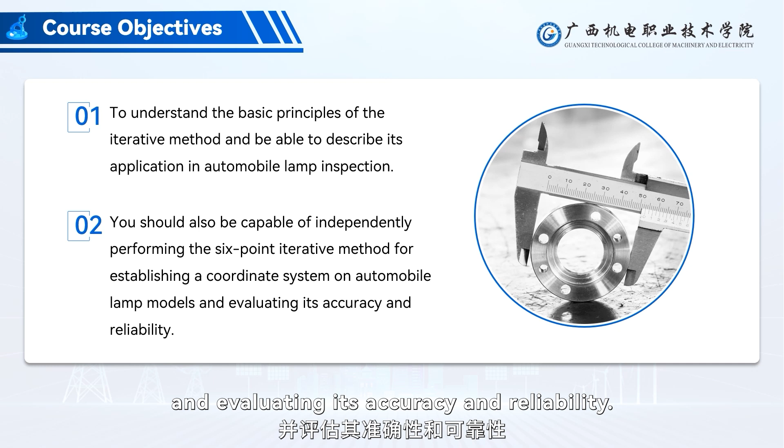Next, we will cover the following topics. By the end of this lesson, we hope you will understand the basic principles of the iterative method and be able to describe its application in automobile lamp inspection. You should also be capable of independently performing the 6-point iterative method for establishing a coordinate system on automobile lamp models and evaluating its accuracy and reliability.

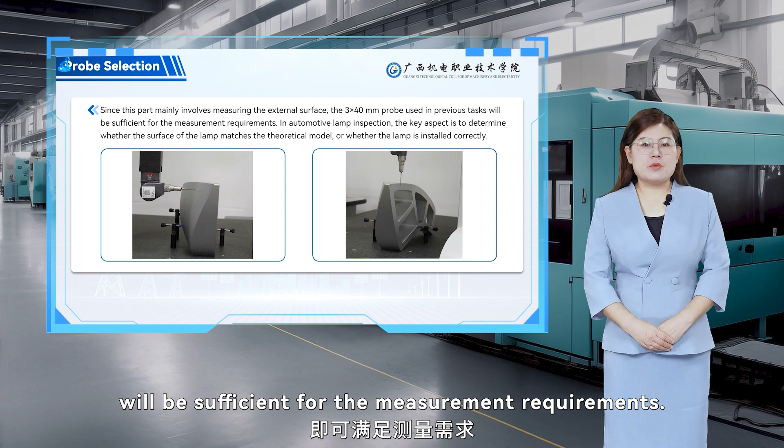First, let's talk about the selection of probes. Since this part mainly involves measuring the external surface, the 3 by 40 mm probe used in previous tasks will be sufficient for the measurement requirements.

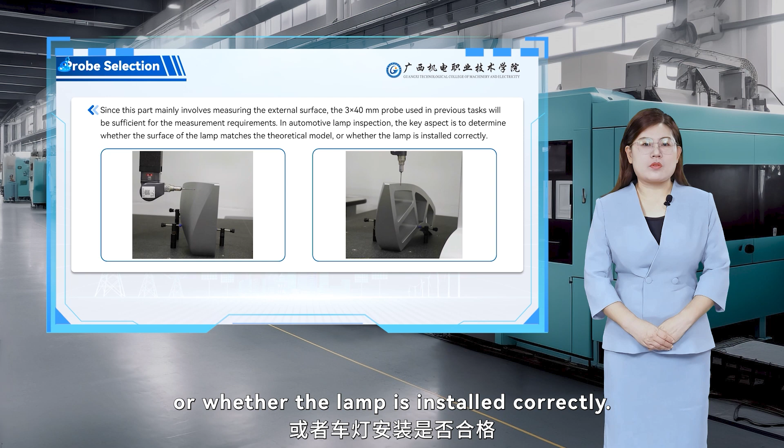In automotive lamp inspection, the key aspect is to determine whether the surface of the lamp matches the theoretical model, or whether the lamp is installed correctly. By measuring the deviation between the actual surface of the workpiece and the theoretical values, we can assess whether the assembly is qualified.

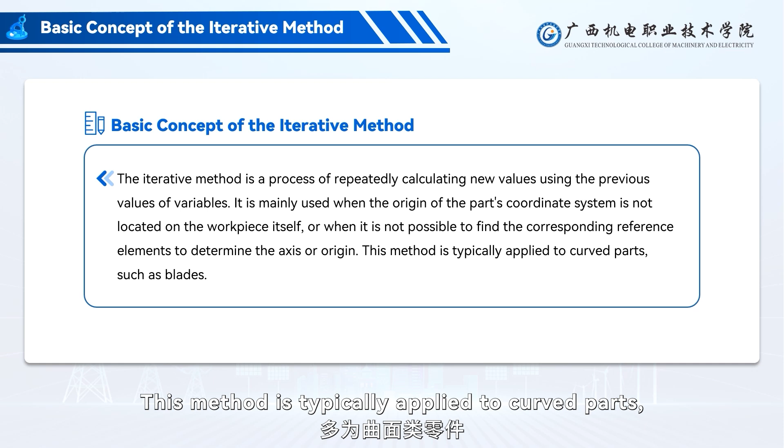Next, let's explore the basic concept of the iterative method. The iterative method is a process of repeatedly calculating new values using the previous values of variables. It is mainly used when the origin of the part's coordinate system is not located on the workpiece itself, or when it is not possible to find the corresponding reference elements to determine the axis or origin. This method is typically applied to curved parts, such as blades.

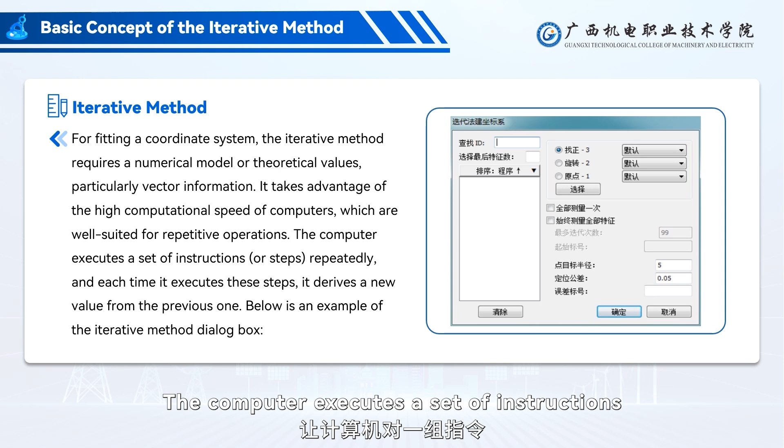For fitting a coordinate system, the iterative method requires a numerical model or theoretical values, particularly vector information. It takes advantage of the high computational speed of computers, which are well suited for repetitive operations. The computer executes a set of instructions, or steps, repeatedly, and each time it executes these steps, it derives a new value from the previous one. Below is an example of the iterative method dialog box.

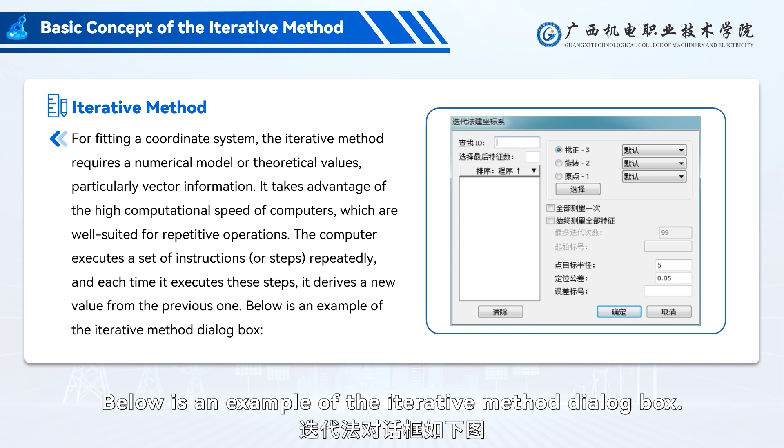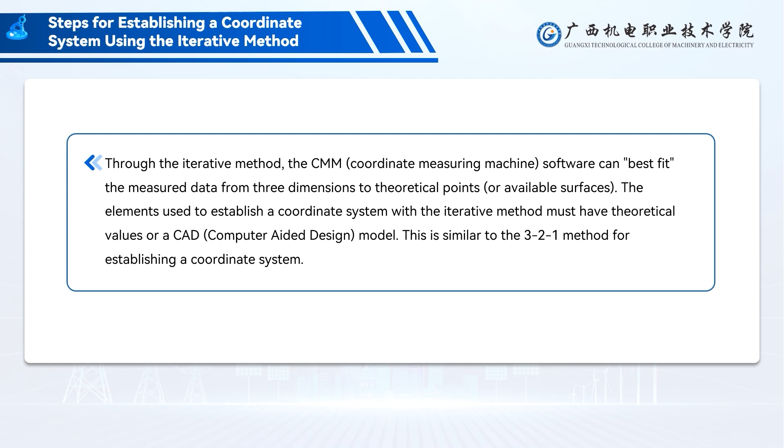Steps for establishing a coordinate system using the iterative method. Through the iterative method, the CMM (Coordinate Measuring Machine) software can best fit the measured data from 3 dimensions to theoretical points, or available surfaces. The elements used to establish a coordinate system with the iterative method must have theoretical values or a CAD (computer-aided design) model. Similar to the 3-2-1 method for establishing a coordinate system, the iterative method also determines the first axis by alignment, the second axis by rotation, and finally the origin's position.

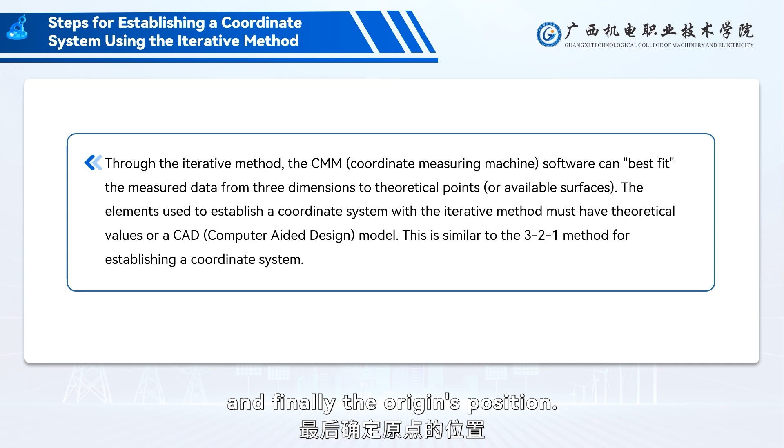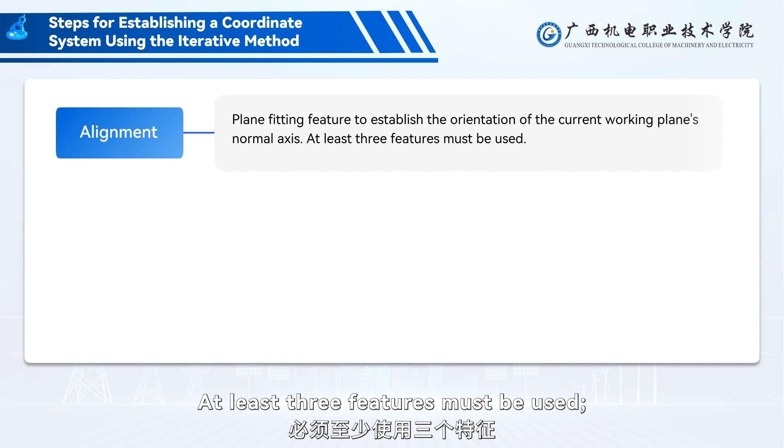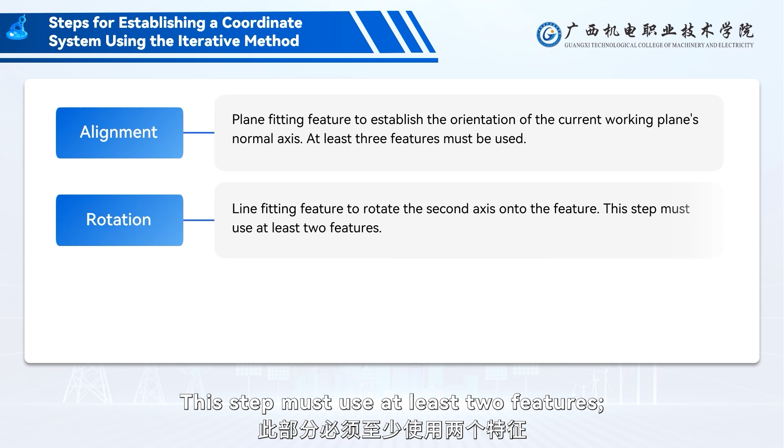1. Alignment: plane fitting feature to establish the orientation of the current working plane's normal axis. At least 3 features must be used. 2. Rotation: line fitting feature to rotate the second axis onto the feature. This step must use at least 2 features. 3. Origin: used to translate the part's origin to a specified location.

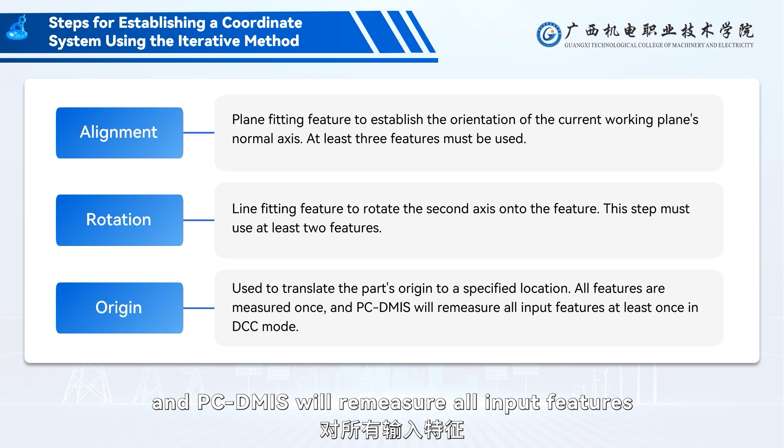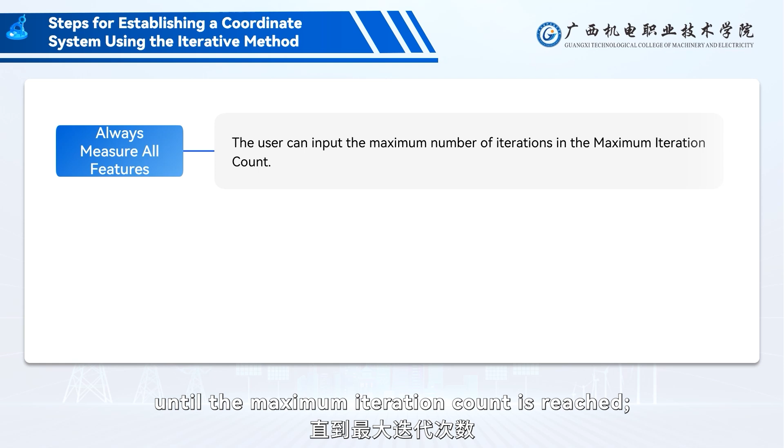All features are measured once, and PC-DMIS will remeasure all input features at least once in DCC mode. For always measure all features, the user can input the maximum number of iterations in the maximum iteration count. PC-DMIS will remeasure all input features at least once in DCC mode. If they are within the target radius, no further execution is needed. If any point does not hit the target area, it will be remeasured until the maximum iteration count is reached.

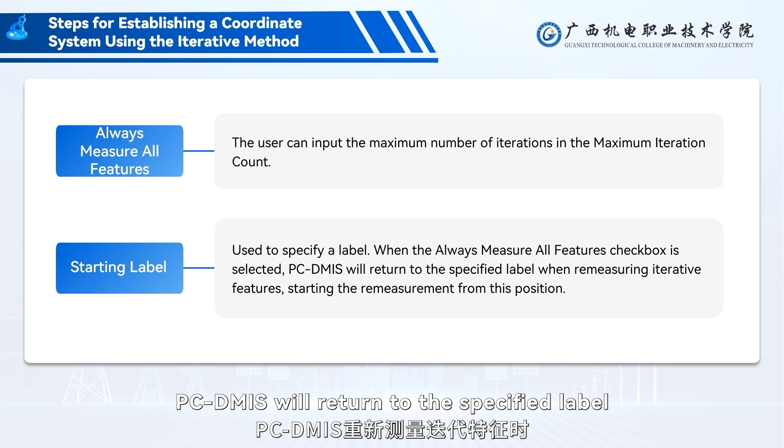5. Starting label: used to specify a label. When the Always Measure All Features checkbox is selected, PC-DMIS will return to the specified label when remeasuring iterative features, starting the remeasurement from this position. 6. Point target radius: a tolerance zone, radius size, can be set around each point for easier manual point collection within the tolerance area. If the measurement point is outside this zone, PC-DMIS will remeasure this point in DCC mode.

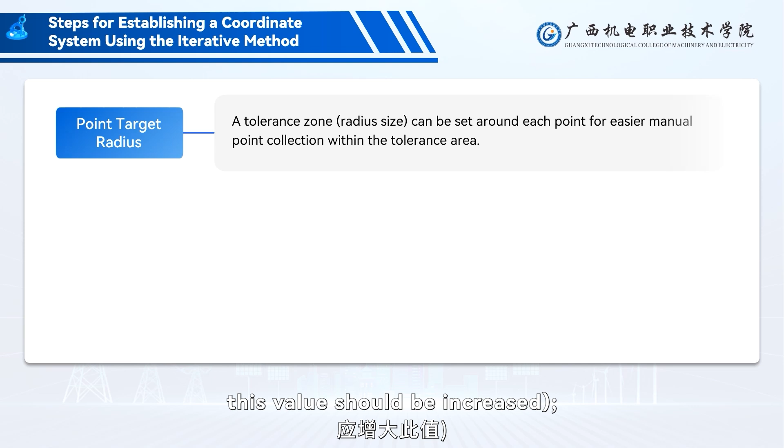A good tolerance selection is around 0.5 mm. If the remeasurement continues indefinitely, this value should be increased. 7. Positioning tolerance: used to enter a fitting tolerance value.

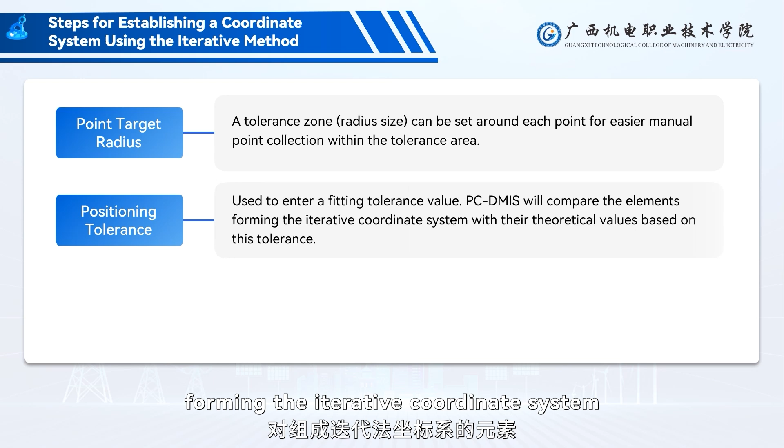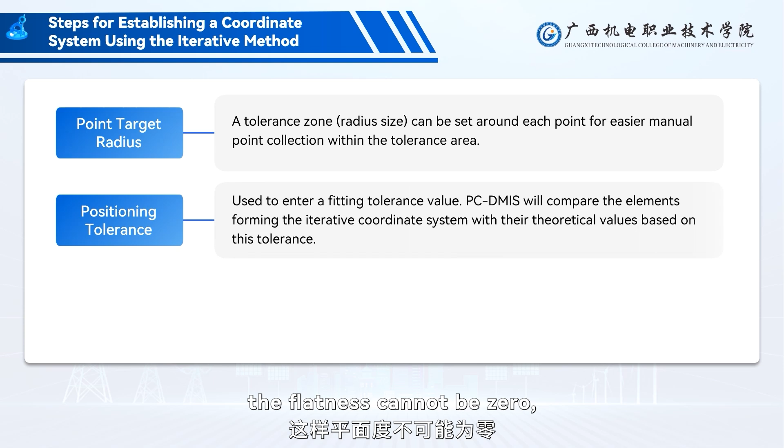PC-DMIS will compare the elements forming the iterative coordinate system with their theoretical values based on this tolerance. Positioning tolerance only takes effect when the number of features used to establish the datum exceeds the minimum number: 3 for alignment, 2 for rotation, 1 for the origin. For example, if 4 features are used to fit a plane for alignment, the flatness cannot be 0, and the positioning tolerance will act as a limiting factor in this case.

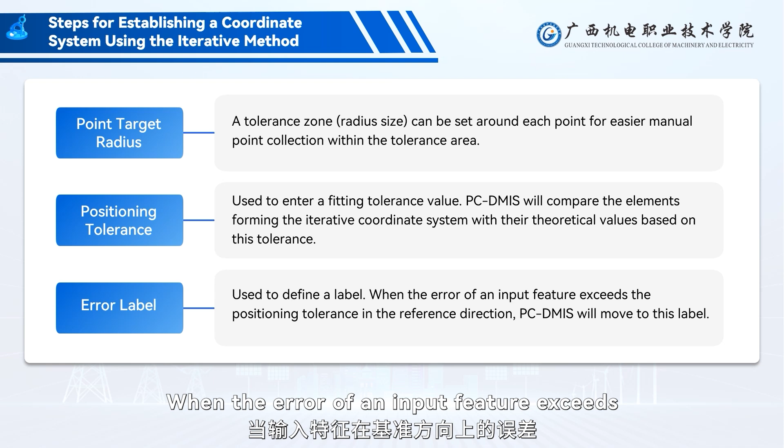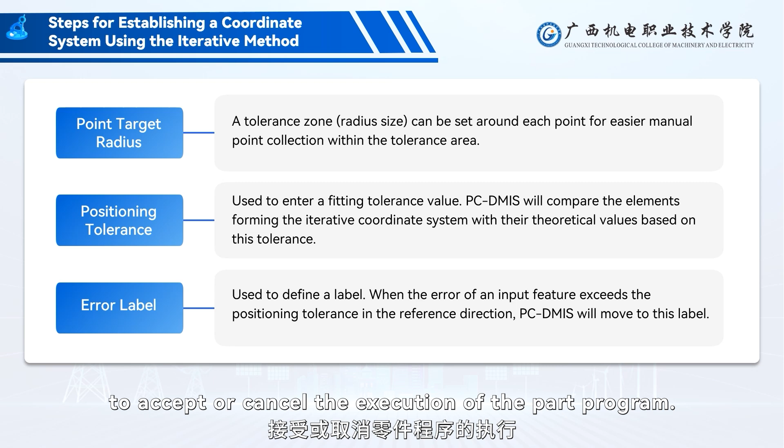8. Error label: used to define a label. When the error of an input feature exceeds the positioning tolerance in the reference direction, PC-DMIS will move to this label. If no error label is provided, PC-DMIS will display an error message indicating the error in each reference direction, and the user can choose to accept or cancel the execution of the part program.

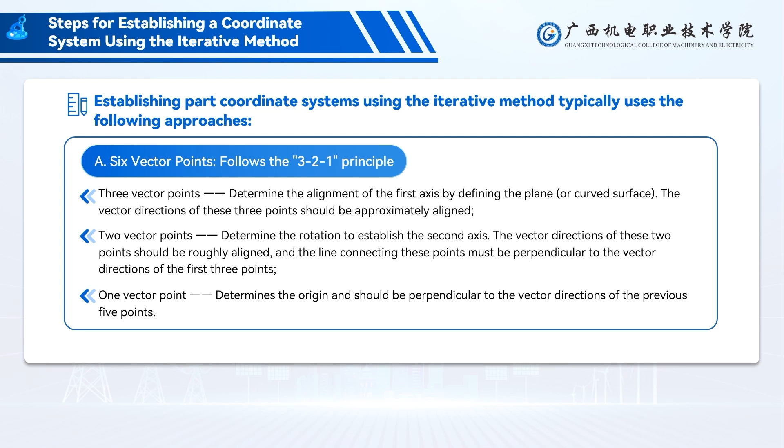Establishing part coordinate systems using the iterative method typically uses the following approaches. A. 6 vector points, follows the 3-2-1 principle. B. 3 circles or spheres, follows the 3-2-1 principle.

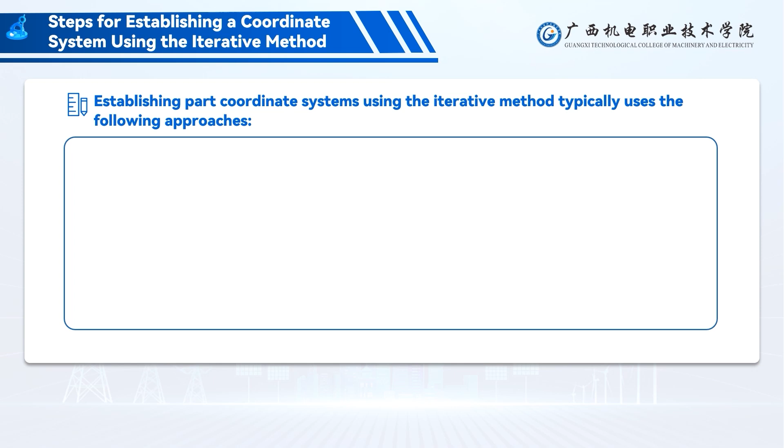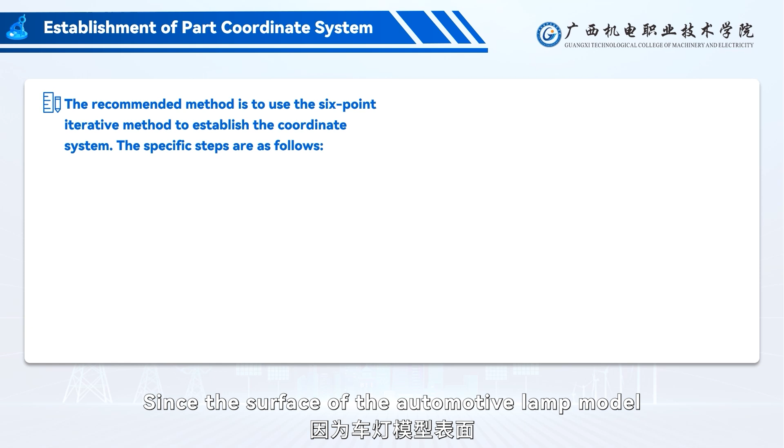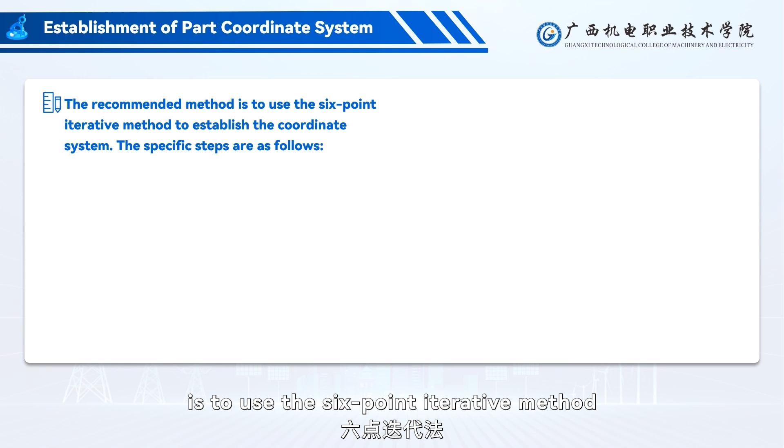Now let's look in detail at how the part coordinate system is established. Since the surface of the automotive lamp model is entirely curved, the conventional 3-2-1 method for establishing a coordinate system cannot be used here. In this case, the recommended method is to use the 6-point iterative method to establish the coordinate system. The specific steps are as follows.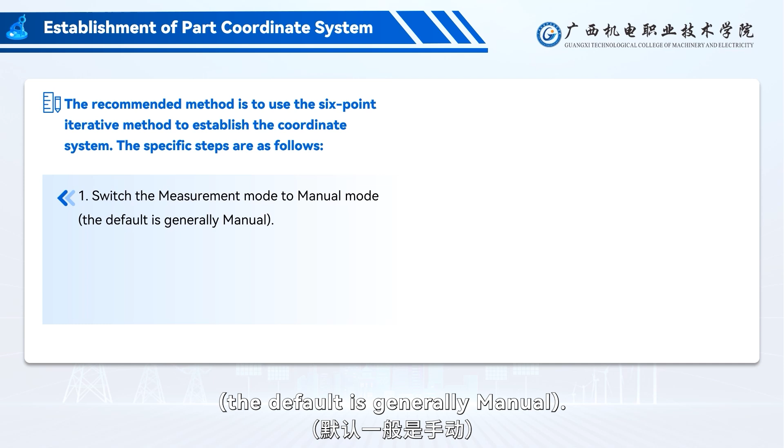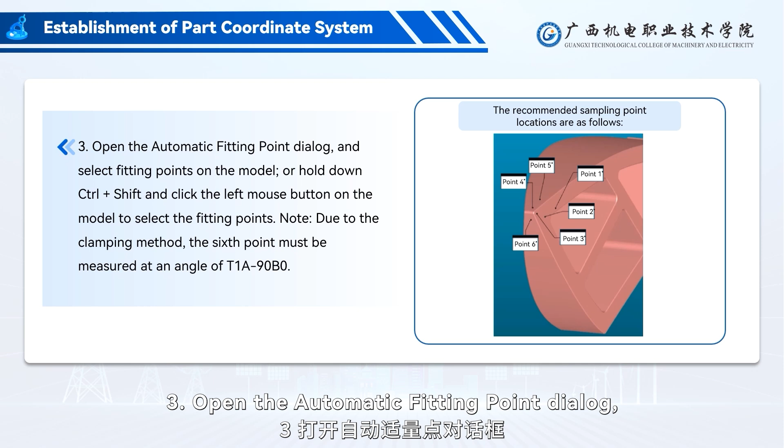1. Switch the measurement mode to manual mode. The default is generally manual. 2. Import the appropriate format of the automotive lamp model via File and Import. 3. Open the Automatic Fitting Point dialog and select fitting points on the model, or hold down Ctrl+Shift and click the left mouse button on the model to select the fitting points.

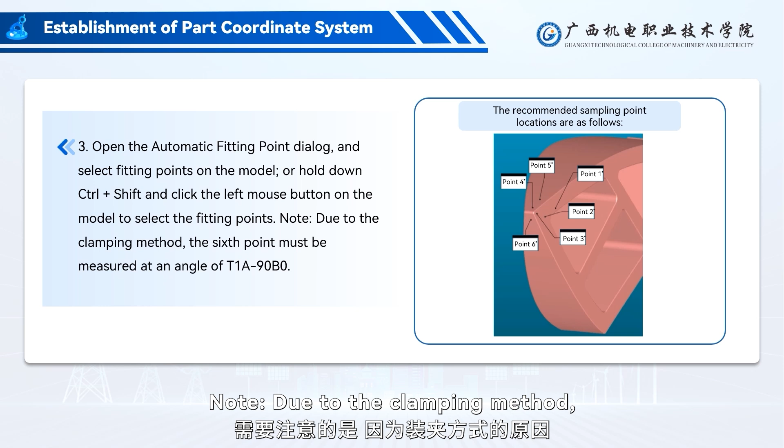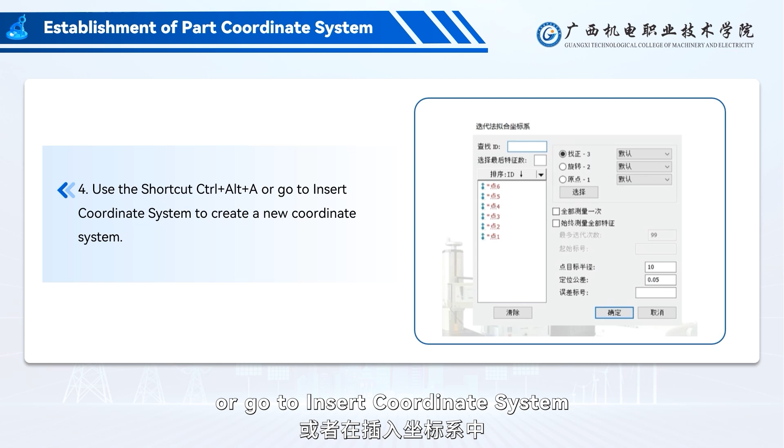Note, due to the clamping method, the 6th point must be measured at an angle of T1A-90B0. 4. Use the shortcut Ctrl+Alt+A or go to Insert Coordinate System to create a new coordinate system. 5. Click on Iterative Method to enter the iterative method for establishing the coordinate system.

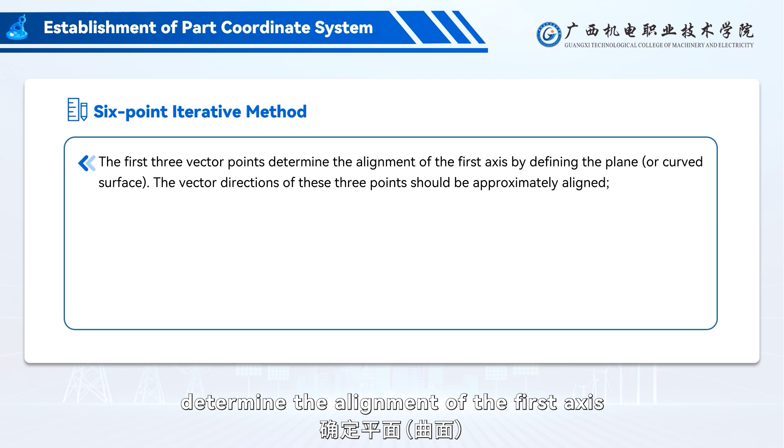Now let's emphasize the principle of the 6-point iterative method. The first 3 vector points determine the alignment of the first axis by defining the plane, or curved surface. The vector directions of these 3 points should be approximately aligned.

The 4th and 5th vector points determine the rotation to establish the second axis. The vector directions of these 2 points should be roughly aligned, and the line connecting these points must be perpendicular to the vector directions of the first 3 points. The 6th point determines the origin and should be perpendicular to the vector directions of the previous 5 points.

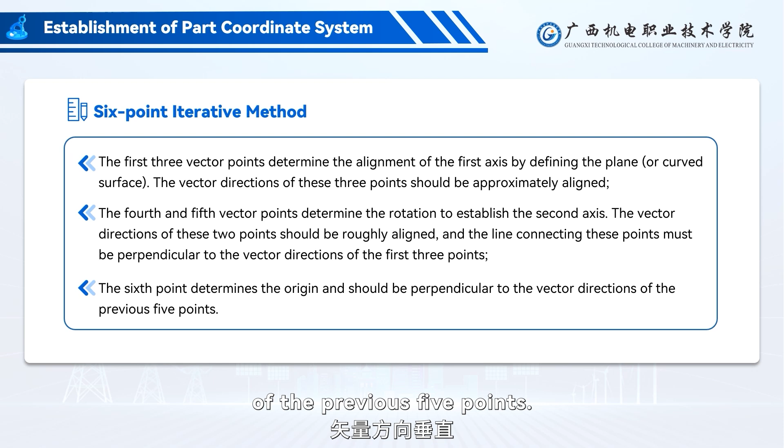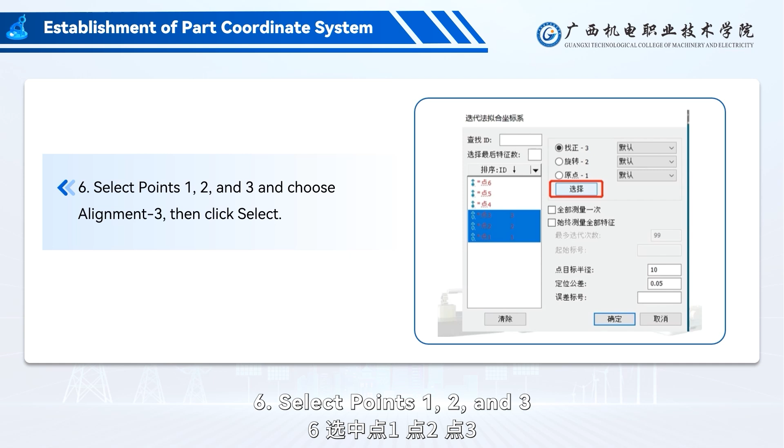According to the previously learned method of establishing the coordinate system using the 6-point iterative method: 6. Select points 1, 2, and 3 and choose alignment 3, then click Select. 7. Select points 4 and 5 and choose rotation 2, then click Select. 8. Select point 6 and choose origin 1, then click Select. Afterward, click OK to complete the programming operation for the iterative method of establishing the coordinate system.

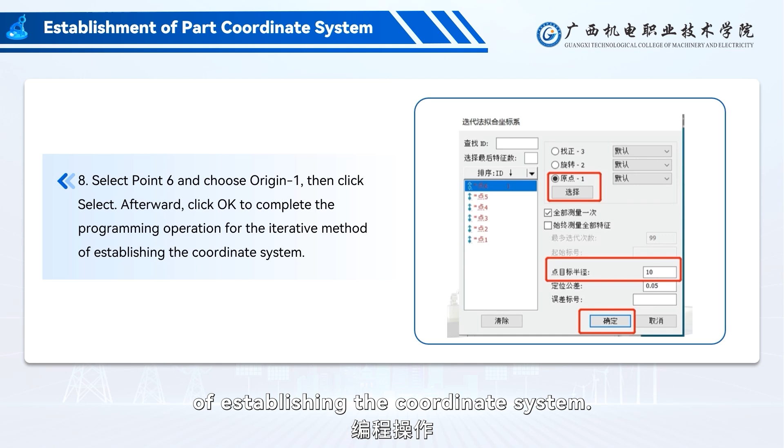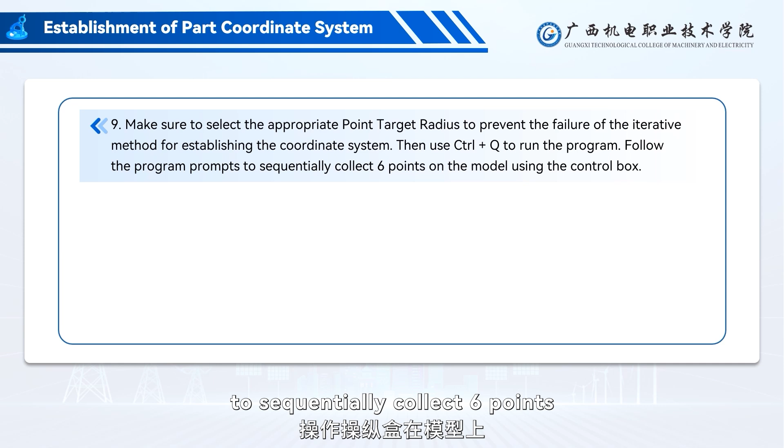9. Make sure to select the appropriate point target radius to prevent the failure of the iterative method for establishing the coordinate system. Then use Ctrl+Q to run the program. Follow the program prompts to sequentially collect 6 points on the model using the control box.

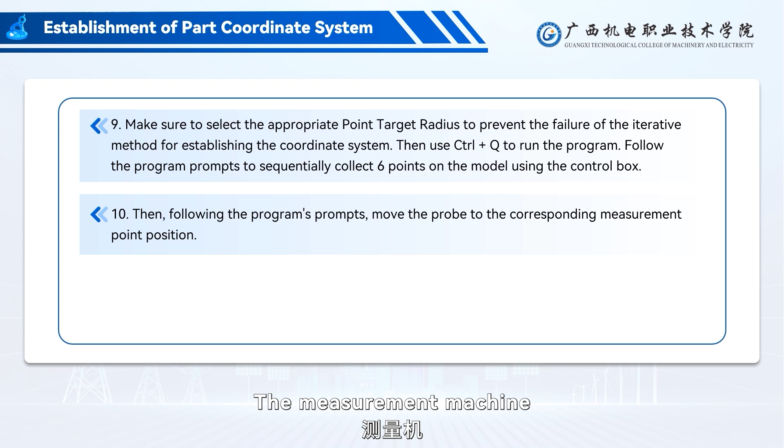10. Then, following the program's prompts, move the probe to the corresponding measurement point position. The measurement machine will automatically collect the points. 11. Once the points are collected, the iterative method for establishing the coordinate system is complete.

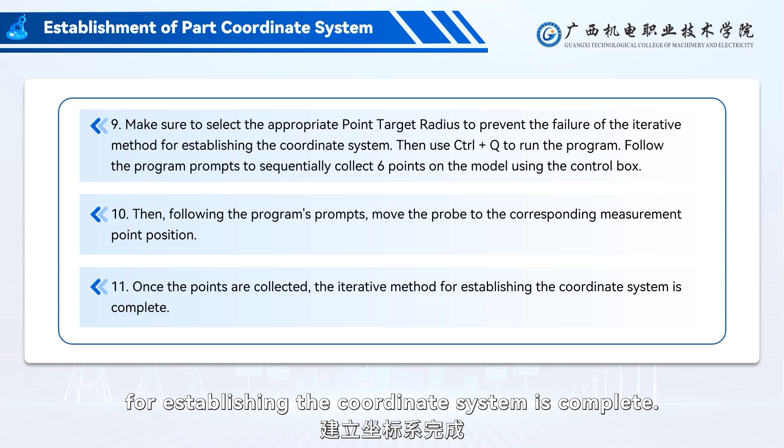We take actual measurements as an example, establish an iterative coordinate system, and use the positions of the points and the measurement path. First, use the A0B0 angle to measure 3 points on the side of the part. Next, raise the probe and measure 2 points at the top of the part.

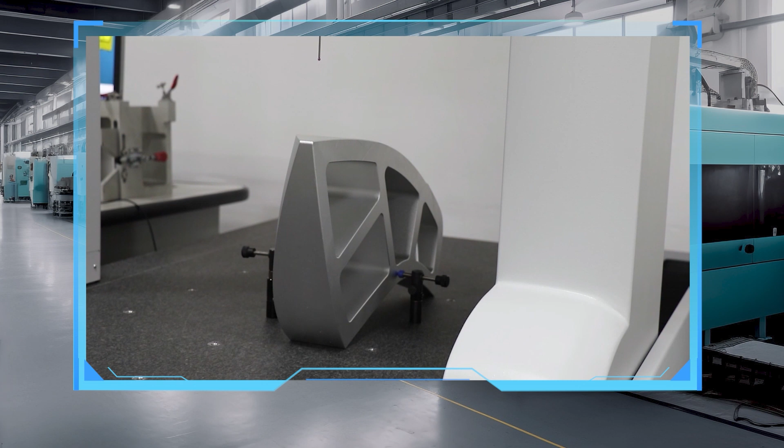Finally, raise the probe again, rotate it to the correct angle, and measure 1 point at the front of the part. This completes the point selection for the coordinate system using the iterative method.

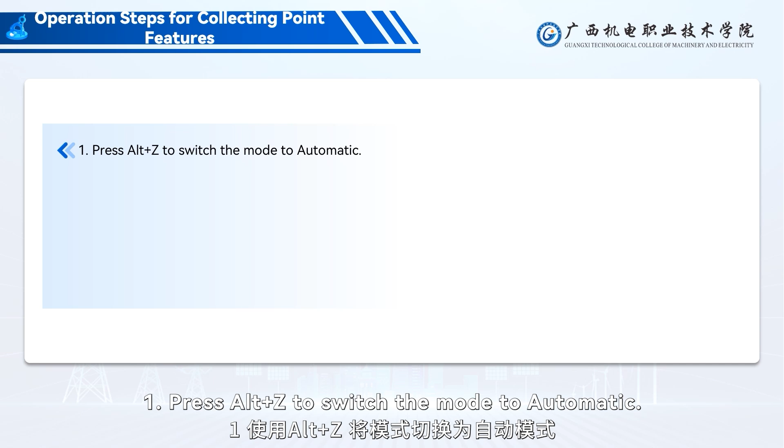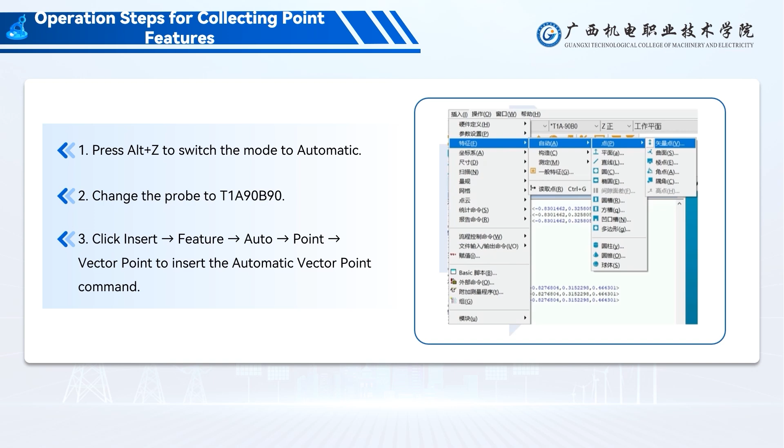Next, let's talk about the collection of point features. The specific steps are as follows. 1. Press Alt+Z to switch the mode to automatic. 2. Change the probe to T1A90B90. 3. Click Insert Feature Auto Point Vector Point to insert the automatic vector point command. Select a point on the model and click Create. Set the clearance move to 20.

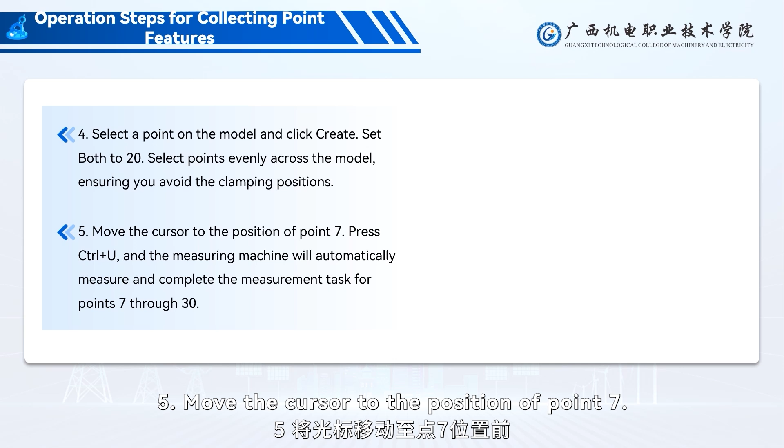4. Select points evenly across the model, ensuring you avoid the clamping positions. 5. Move the cursor to the position of point 7. Press Ctrl+U, and the measuring machine will automatically measure and complete the measurement task for points 7 through 30.

Next, let's take a look at the movement path of the measuring machine and the point selection for automatically measuring from point 7 to point 30. Since each vector point has a clearance move of 20 enabled, the probe will move 20 units away from the measurement direction both before and after measuring each point.

Through this explanation, we've gained a deeper understanding of the basic principles and applicable scenarios of the iterative method. We've also mastered the specific steps for using the iterative method to establish a part coordinate system and learned about its practical applications in automotive lamp inspection. The iterative method provides an effective solution for the measurement challenges of curved parts, and I hope you can apply it flexibly to enhance both accuracy and efficiency of measurement.

Finally, please reflect on this lesson and complete the following exercises to consolidate the knowledge you learned today and deepen your understanding. That concludes today's lesson. See you next time.